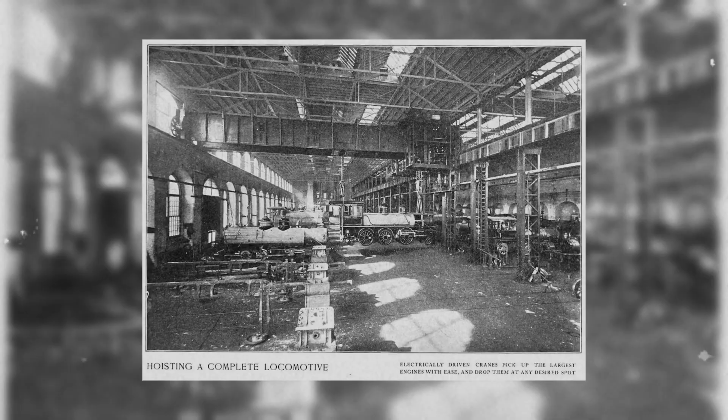Decades prior, this was no mere factory. It was a sprawling, self-sustaining kingdom. At its zenith, 20,000 workers labored in its fiery belly, forging over 70,000 locomotives that conquered untamed frontiers and stitched continents together. When two world wars plunged the globe into darkness, this very soil birthed thousands of Sherman and Patton tanks, acting as a relentless arsenal of democracy. Its foundries burned with a fierce ambition that seemed to challenge the sun itself.

Now that empire is ash. The deafening symphony of forging hammers and hissing steam has been swallowed by the hollow wind howling over rusted scrap. A city of livelihoods evaporated into nothingness.

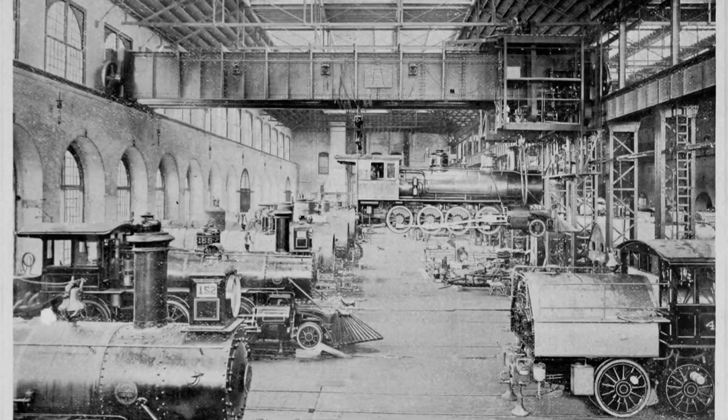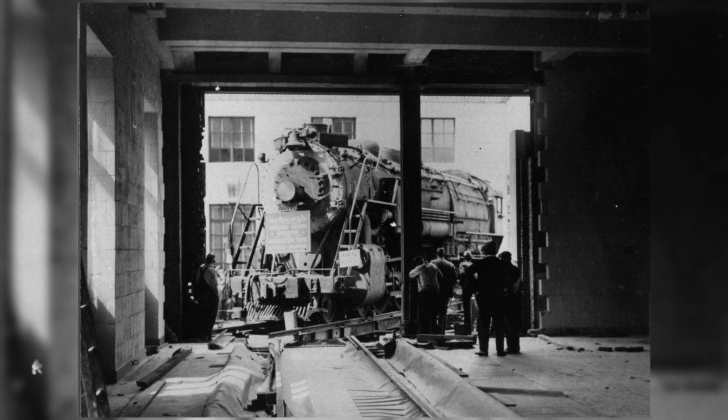How does an undisputed titan of such colossal power, the very engine of the modern world, simply vanish? It wasn't a sudden economic crash. It wasn't foreign sabotage. The beast was devoured from within by a singular, blinding hubris. This is the saga of Baldwin's Eddystone. Step into the ruins of an industrial titan to witness a profound tale of towering ambition, tragic pride, and the devastating cost of a king refusing to change his crown.

Long before the silence claimed the Delaware River, there was a deafening roar in the heart of Philadelphia. By the turn of the 20th century, the Baldwin Locomotive Works was not merely a company. It was a reigning monarch of the industrial age. Yet, this undisputed king of steam was slowly being suffocated by the very kingdom it helped build.

For decades, Baldwin's sprawling Broad Street complex had been a marvel of manufacturing, a dense, pulsating labyrinth of brick and iron right in the middle of a rapidly modernizing metropolis. But success has a peculiar way of becoming a cage. As the American frontier expanded and global trade exploded, the world did not just want more locomotives, it demanded larger, heavier, and infinitely more powerful machines. The era of quaint, wood-burning engines had passed, giving way to fire-breathing leviathans made of solid steel.

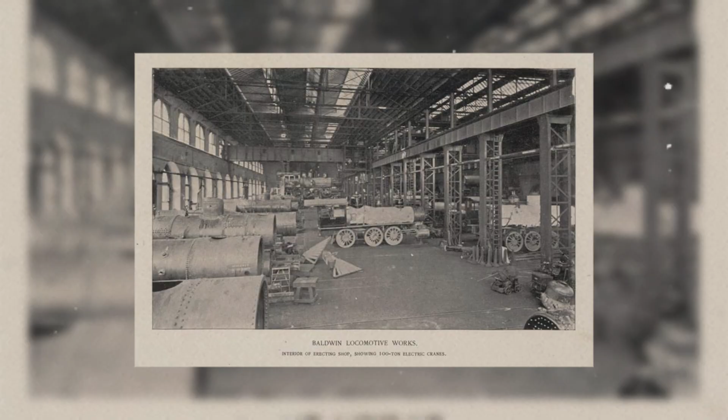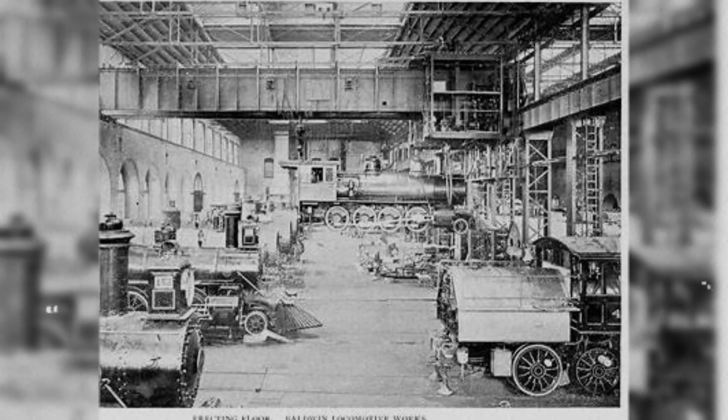The Broad Street facility, however, could not stretch. It was landlocked by the encroaching city, trapped in a grid of narrow streets, civic buildings, and residential neighborhoods. The situation bordered on the absurd. To move a completed locomotive out of the factory, workers often had to halt city traffic, navigating multi-ton behemoths through tightly packed intersections. The ground of Philadelphia trembled daily beneath the weight of progress, and the sky was perpetually choked with the thick, acrid smoke of the foundries. The citizens, though proud of their industrial titan, were growing tired of sweeping soot from their pristine porches. Baldwin had become a giant forced to live in a closet.

The leadership of Baldwin, driven by the relentless and visionary energy of men like Samuel Vauclain, recognized a terrifying truth: to stand still in the age of industry was to die. They could not continue to build the future's iron arteries in a facility that belonged to the past. The company needed space, not just to breathe, but to conquer. They required a blank canvas vast enough to hold ambitions that bordered on the mythical.

The search for a new home led them away from the claustrophobic avenues of Philadelphia and down the Delaware River. What they found, approximately 13 miles to the south, was not a glittering industrial park, but a desolate, marshy expanse known as Eddystone. It was 600 acres of damp, unpromising earth, heavily burdened by tidal mud and wild overgrowth. To the untrained eye, it was a wasteland. To the visionaries at Baldwin, it was paradise.

The proposal to purchase and develop Eddystone was a masterclass in industrial audacity. It was not simply a matter of erecting a few new warehouses. The plan called for the creation of an entirely new, self-sustaining world. It meant uprooting an established workforce, tearing up decades of operational history, and pouring an astronomical fortune into a swamp.

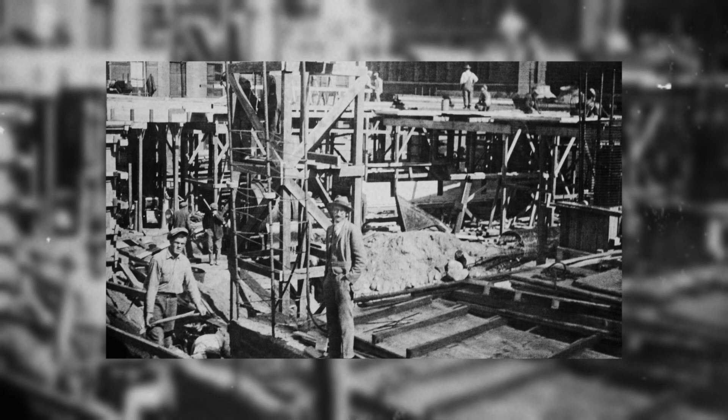There was also a profound emotional toll to the decision. Leaving Broad Street meant abandoning the sacred ground where Matthias Baldwin had built his very first locomotive, Old Ironsides, back in 1832. It was a severing of roots, a high-stakes gamble that traded a comfortable, proven history for a wild, muddy frontier. Yet the ambition of the era demanded sacrifice. The boardroom debates were fierce, but the writing on the wall was clear.

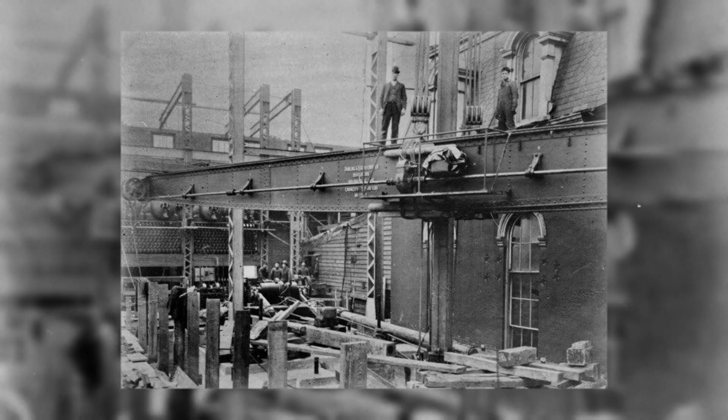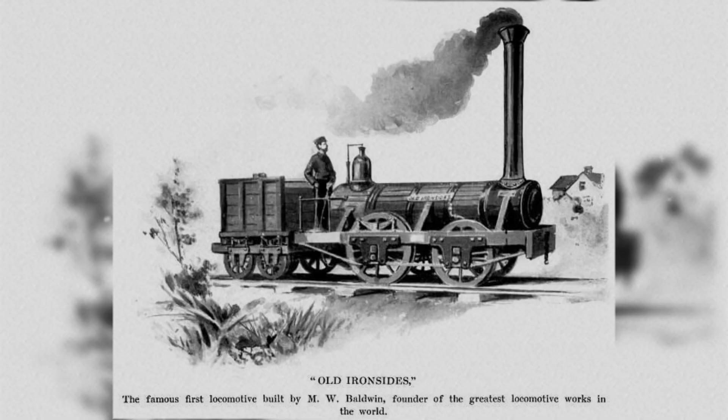The locomotives of tomorrow could not be born in the confines of yesterday. With a mixture of calculated brilliance and sheer, stubborn willpower, the decision was finalized. Baldwin would move. They would conquer the mud of Eddystone just as their engines had conquered the Rocky Mountains. They would not just build a factory, they would engineer a mechanized city-state, a monument to human labor and iron that would dwarf anything the world had ever seen.

As the first shovel struck the soft, marshy earth of the Delaware riverbank, the die was cast. The great migration from the cramped heart of Philadelphia to the sprawling shores of Eddystone began. It was the birth of an empire, a monumental undertaking driven by the belief that human hands, armed with enough capital and ambition, could bend geography itself to the will of industry. The ground was being laid for a golden age, setting the stage for a mechanical symphony that would echo across the globe.

The transformation of Eddystone from a silent, waterlogged marsh into the undisputed capital of global locomotive manufacturing did not happen overnight. It was a grueling, decades-long campaign against nature itself. Beginning in the early 1900s, the Baldwin Locomotive Works unleashed an army of engineers and laborers upon the shores of the Delaware River. Their mission was not merely to erect buildings, but to terraform the earth to bear the unimaginable weight of heavy industry. Thousands of wooden pilings were driven deep into the thick mud to reach bedrock, creating a subterranean foundation strong enough to support the massive drop forges and iron foundries that would soon follow.

As the skeletal steel frames of the new buildings pierced the skyline, the sheer, staggering scale of the Eddystone blueprint became visible. This was not a factory. It was a sovereign industrial city-state. Spanning over 600 acres, the complex was meticulously designed to be an entirely self-sustaining ecosystem. The sprawling site was eventually woven together by nearly 30 miles of internal railway tracks, a complex nervous system of standard and narrow-gauge lines that transported raw materials, giant boiler plates, and partially assembled engines between dozens of specialized shops.

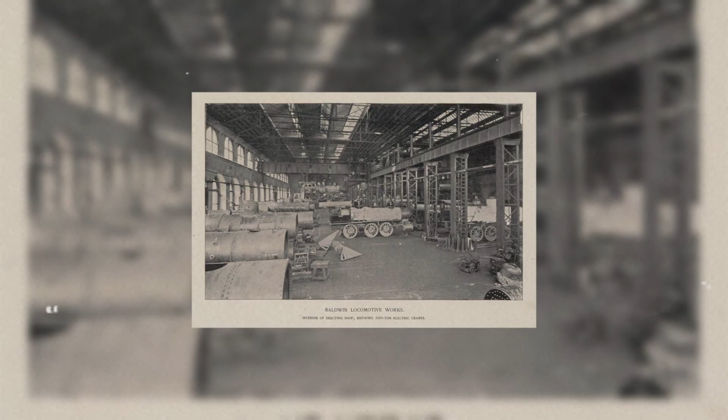Every geographical feature of the land was weaponized for maximum efficiency. The Delaware River was no longer just a scenic boundary, it was transformed into a global shipping artery. Baldwin constructed massive deep-water docks equipped with towering cranes, allowing ocean-going freighters to pull up directly to the factory's edge. This meant a locomotive could be tested on the Eddystone tracks in the morning and loaded directly into the hull of a ship bound for South America or Europe by nightfall.

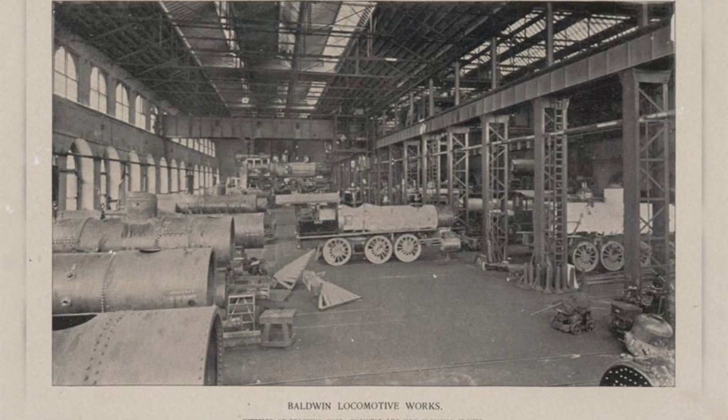Inside the walls, the architecture was cavernous. The erecting shops were so unimaginably vast, stretching for fractions of a mile, that foremen and supervisors famously relied on bicycles to navigate the factory floor. Overhead, colossal bridge cranes glided along steel tracks, effortlessly lifting 80-ton boilers as if they were hollow toys. The central power plant, a towering structure billowing thick black smoke, generated enough electricity and compressed air to power a small metropolis.

By the 1920s, the painful, agonizing transition from the claustrophobic Broad Street plant was complete. The gamble had paid off. Baldwin had successfully transplanted its beating heart into a body uniquely designed to dominate the 20th century. The infrastructure was in place. The Leviathan's lair was built. All it needed now was the relentless, driving force of human labor to awaken the beast.

When the great whistles of Eddystone shrieked at the break of dawn, they summoned an army. The workforce swelled into the tens of thousands, transforming the surrounding Delaware County into a bustling hive of working-class neighborhoods. Generations of families, immigrants seeking the American dream, seasoned machinists and raw laborers, poured through the iron gates day after day. They were the blood in the factory's veins, feeding an insatiable hunger for production.

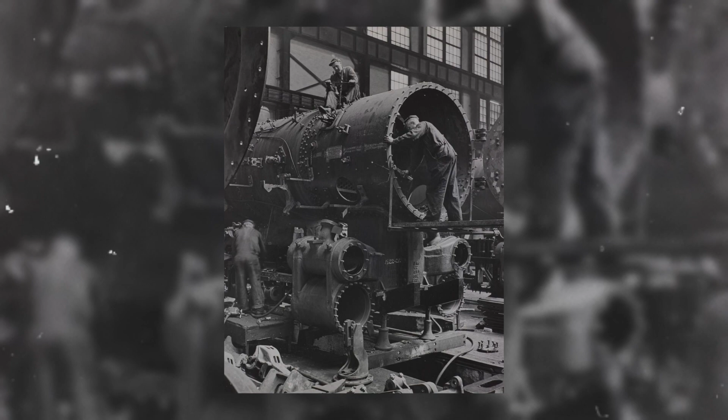The rhythm of Eddystone was a symphony of deafening violence. Inside the foundries, the temperature regularly soared past 120 degrees. Men wrapped in heavy protective leather danced around crucibles of molten iron, their faces illuminated by the demonic orange glow of liquid metal. Giant steam hammers, dropping with the force of small earthquakes, slammed into glowing ingots of steel, shaping the colossal driving rods that would propel the world's trains. The air was perpetually thick with the taste of sulfur, the sharp tang of ozone from early welding torches, and the ubiquitous, choking dust of coal and sand.

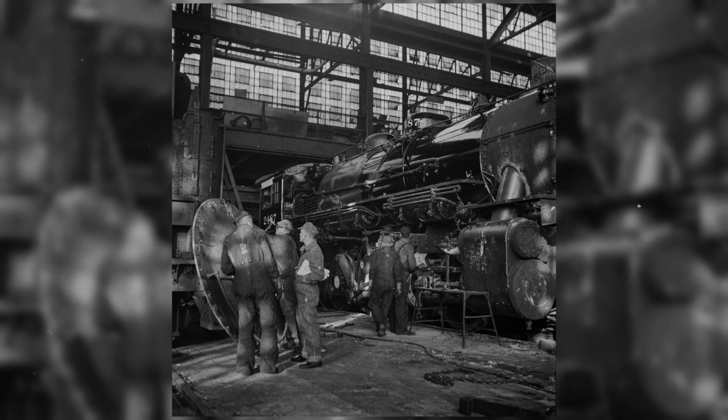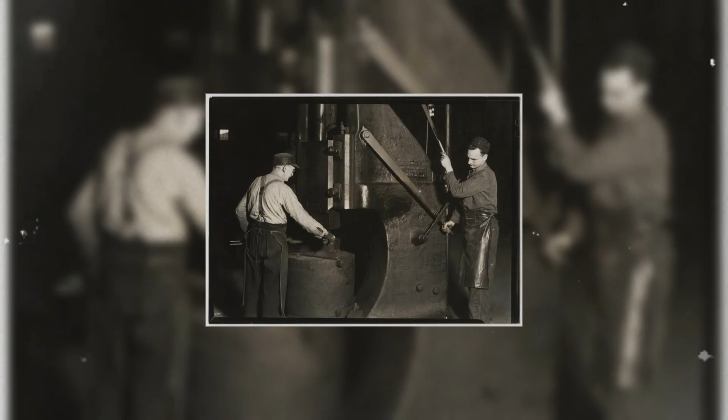Yet beneath this raw, violent display of brute force lay a demand for microscopic precision. A steam locomotive was a heavy-duty titan, but its internal valves, pistons, and cylinders required the delicate, exact tolerances of a Swiss watch. If a single boiler rivet was compromised, or a piston ring milled a fraction of an inch too wide, the resulting explosion could tear the machine, and the men around it, to pieces.

Managing this duality of colossal scale and millimeter precision was the true genius of the Eddystone workforce. During the golden age of steam, the output was staggering. Locomotives rolled out of the erecting shops in a seemingly endless procession. Baldwin was not just supplying the Pennsylvania Railroad or the Santa Fe.

They were equipping the world. Eddystone engines climbed the treacherous, thin-aired passes of the Andes in Chile, crossed the frozen steppes of Imperial Russia, and hauled freight across the deserts of Egypt. They were the undisputed mechanical marvels of their time, custom-built beasts tailored to the exact specifications of any gauge, climate, or terrain on Earth. However, this relentless pace harbored a hidden, grinding tension.

The logistics of feeding the Eddystone machine were a daily tightrope walk. Millions of pounds of raw iron ore, coal, and lumber had to arrive with perfect timing. If the brass foundry fell behind by a few hours, the massive erecting shops ground to a halt, costing the company fortunes in idle labor. The pressure on the floor supervisors to maintain the flow of production was absolute and unforgiving.

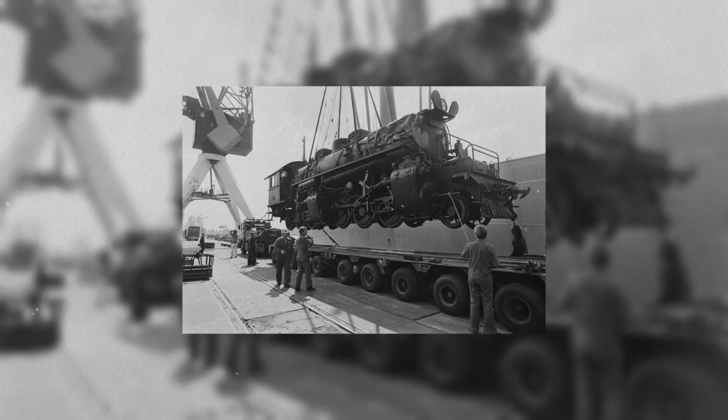For a time, the system held perfectly. Eddystone was a marvel of the modern world, a flawless engine of capitalism and engineering. As the 1930s approached, the men of Baldwin looked out over their 600-acre domain of fire and steam, confident that their reign would last forever. They were the kings of the rails, entirely unaware that the darkest, most demanding trials of human history were looming just over the horizon, ready to push the great factory to its absolute, breaking limit.

The sprawling complex of Eddystone had barely settled into its rhythm as the world's premier locomotive manufacturer when the geopolitical foundations of the globe fractured. In the summer of 1914, Europe descended into the unprecedented carnage of the First World War. The conflict quickly devolved into a grueling war of attrition, demanding logistical supply lines and munitions on a scale humanity had never witnessed. The combatant nations looked across the Atlantic for an industrial savior, and the colossal, fire-breathing foundries of Baldwin's Eddystone were uniquely positioned to answer the call.

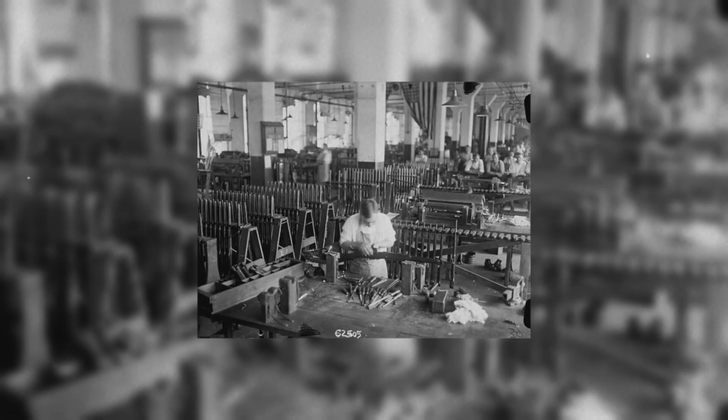Almost overnight, the mission of the great plant shifted from connecting cities to arming empires. The company did not merely increase its locomotive production, it radically diversified its manufacturing base to feed the insatiable hunger of the Western Front. Recognizing the desperate need for infantry weapons, Baldwin constructed a massive auxiliary facility on the Eddystone grounds, the Eddystone Rifle Plant. Operated in conjunction with Remington Arms, this colossal sub-factory became the largest rifle manufacturing plant in the world.

At its peak, the facility was churning out up to 6,000 M1917 Enfield rifles every single day. By the war's end, nearly 2 million rifles had been produced on Baldwin soil, arming the vast majority of the American Expeditionary Forces. But the transformation did not stop at small arms.

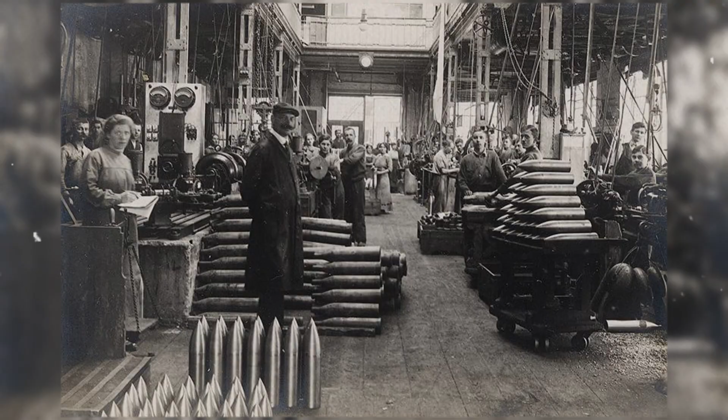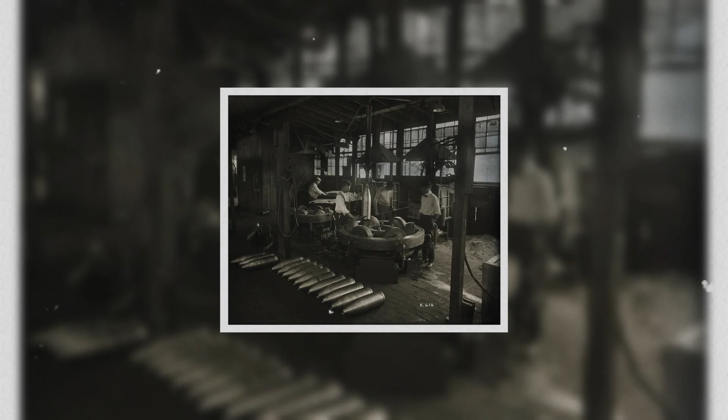The heavy hydraulic presses and giant drop forges that had previously shaped driving wheels and axles were recalibrated for a far more destructive purpose. Eddystone began producing millions of artillery shells, transforming raw steel into high-explosive ordnance, destined for the trenches of France and Belgium. The factory floor became a chaotic, deafening landscape where the sharp, metallic clatter of rifle assembly lines competed with the ground-shaking thunder of heavy munitions forging.

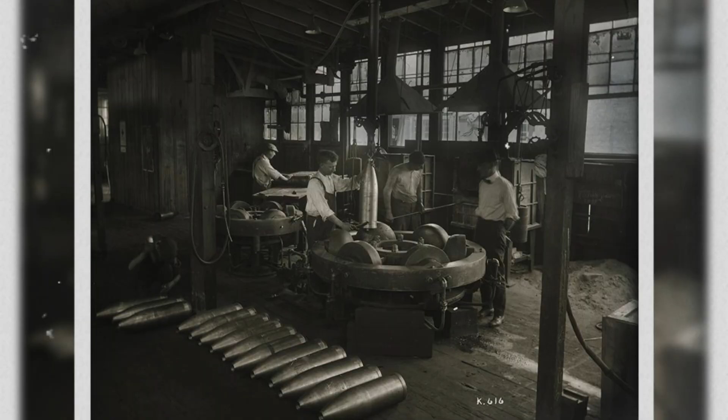Amidst the production of weapons, Baldwin's core competency remained critical to the war effort. The muddy, cratered battlefields of Europe required robust, reliable transportation to move troops and supplies to the front lines. To meet this demand, Eddystone engineers designed and mass-produced the Pershing locomotives, rugged, specialized steam engines built specifically for the grueling conditions of military railways in France. These iron beasts were rapidly assembled, loaded onto transport ships at the Eddystone docks, and sent directly into the theater of war.

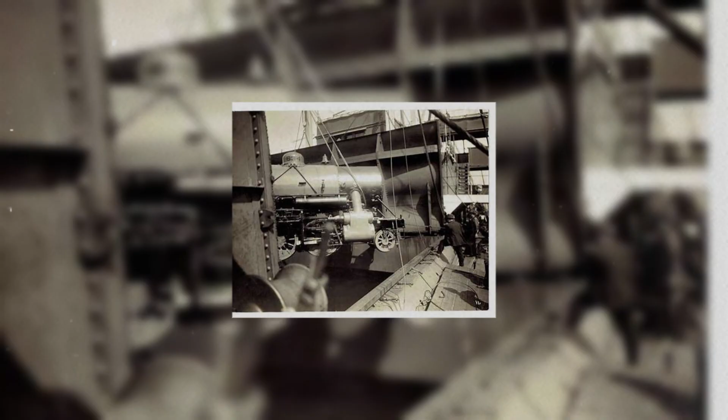This period of explosive wartime expansion injected an unprecedented surge of capital into the Baldwin locomotive works. The government contracts were massive, guaranteed, and seemingly endless. The workforce swelled dramatically, operating in frantic, around-the-clock shifts.

However, this staggering success carried a hidden psychological poison. The sheer volume of output and the immense profits generated during the Great War created a dangerous illusion of invincibility within the Baldwin boardroom. The executives looked at their roaring furnaces and their sprawling 600-acre empire and began to equate sheer industrial mass with permanent supremacy. The sudden flood of wartime money insulated the company from the normal, brutal forces of market competition, planting the early, invisible seeds of complacency that would eventually prove fatal.

The illusion of eternal dominance was severely tested during the Great Depression, which brought railway orders to a devastating halt, yet the sheer size of Baldwin allowed it to weather the storm. But just as the company was stabilizing, the world was plunged into darkness once again.

The outbreak of the Second World War demanded an industrial mobilization that dwarfed even the staggering efforts of the previous conflict. Once more, the United States government turned to the proven titan of Eddystone. This time, the nature of mechanized warfare had evolved, and Baldwin adapted with breathtaking speed.

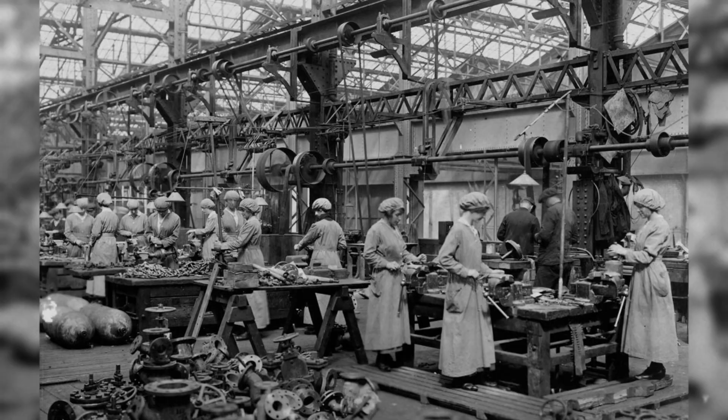Beyond tanks, the facility manufactured massive ship propellers for the U.S. Navy, heavy naval gun mounts, and specialized railway artillery. The workforce transformed again, this time integrating thousands of women who stepped onto the heavy factory floors to operate cranes, weld tank treads, and inspect munitions, keeping the Leviathan running while the men fought overseas.

The patriotic fervor within Eddystone was absolute. Every worker knew that the steel they poured directly contributed to the survival of the free world. Yet beneath the roaring success of this wartime production lay a catastrophic, strategic trap.

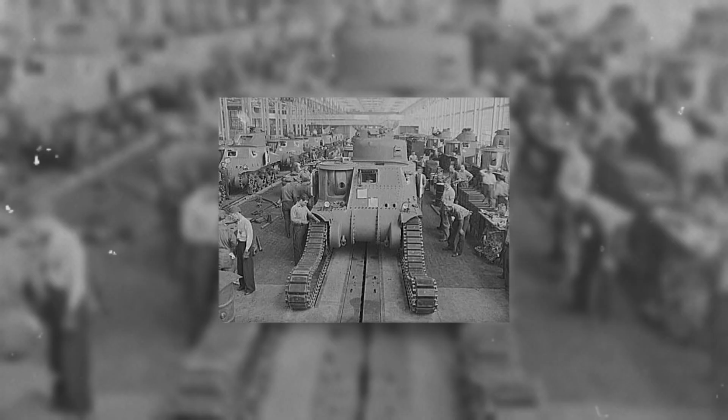The U.S. military logistics network relied heavily on established, reliable technology to move millions of tons of domestic freight to the coasts. Consequently, the War Production Board ordered Baldwin to do what it did best: mass-produce standard steam locomotives. While this mandate was critical for the immediate war effort, it effectively forced Baldwin to double down on an aging technology. All civilian research and development was frozen.

The brilliant engineering minds at Eddystone were entirely consumed by the demands of producing tanks, shells, and wartime steam engines. They had no time, no resources, and no government permission to experiment with alternative forms of propulsion.

Meanwhile, away from the heavy demands of military steam production, a rival was quietly altering the future. General Motors, through its Electro-Motive Division, had already begun perfecting diesel-electric technology before the war. While Baldwin was locked into producing the heavy, maintenance-intensive steam engines required by the military, the diesel engine was being refined into a highly efficient, labor-saving machine.

When the Axis powers finally surrendered and the massive government contracts evaporated overnight, Baldwin awoke to a terrifying new reality. Their triumphant performance in the Second World War had been a brilliant, blinding flash of light that perfectly masked their technological stagnation. They emerged from the conflict as the absolute masters of a dying art, completely unprepared for the silent, efficient revolution that was about to render their fiery empire obsolete.

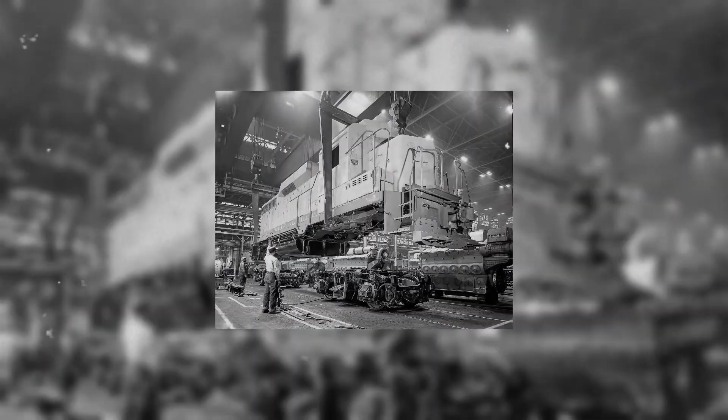When the smoke of the Second World War finally cleared, the Baldwin Locomotive Works stood atop an industrial mountain of its own making. The Eddystone facility was operating at a staggering capacity, its massive foundries still glowing with the heat of wartime production and a massive backlog of domestic orders.

The world was rebuilding, and the executives in Philadelphia believed that the rebuilding would be powered, as it always had been, by the violent, magnificent force of steam. They were the undisputed masters of the firebox, the boiler, and the driving rod. In their eyes, the steam locomotive was not merely a product, it was the ultimate, perfected expression of human engineering.

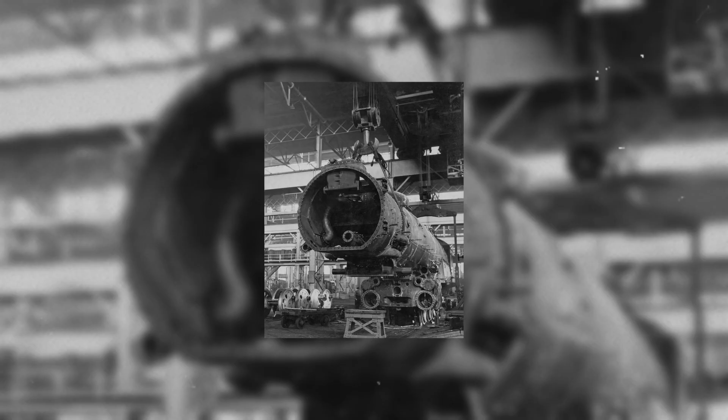Yet, while Baldwin was deafened by the roar of their own success, a quieter, far more insidious revolution was taking place in the American Midwest. General Motors, through its Electro-Motive Division, EMD, had spent the war years perfecting a radically different kind of motive power: the diesel-electric locomotive. To the seasoned veterans of Eddystone, the diesel engine was an object of derision.

It lacked the visceral, breathing soul of a steam engine. A steam locomotive was a custom-tailored behemoth. Railroads would send their chief engineers to Eddystone to dictate every minute specification, from the diameter of the driving wheels to the exact placement of the brass trim. Every steam engine was a unique work of art, a massive, labor-intensive beast that required a dedicated crew to feed it coal, monitor its water levels, and constantly maintain its intricate external moving parts.

The diesel, by contrast, was a sterile, standardized box. It was essentially a power plant on wheels, a diesel engine turning a generator, which in turn powered electric traction motors on the axles. It didn't roar, it hummed. It didn't require a fireman to shovel coal or an ash pit to clean its underbelly. Most offensively to the traditionalists at Baldwin, General Motors did not custom build them. They treated locomotives like automobiles, offering a catalog of standardized models, mass-produced on an assembly line with interchangeable parts.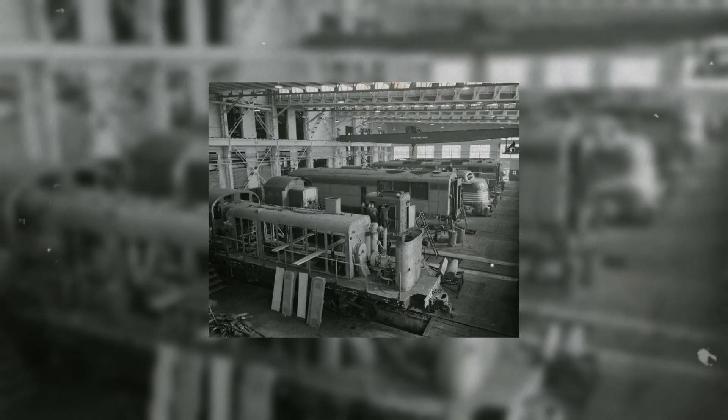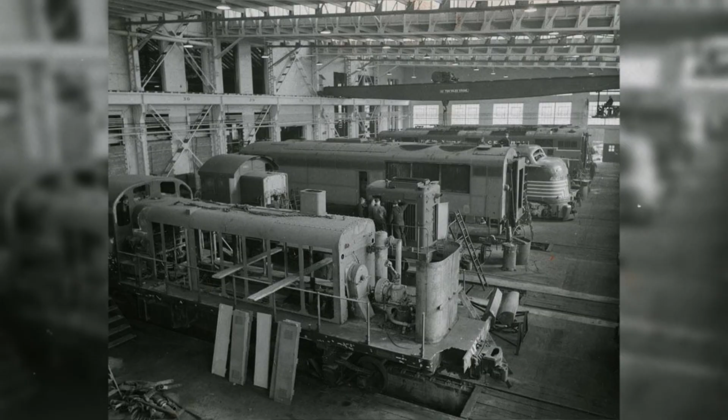This conceptual clash created a fatal, blinding hubris within the Baldwin boardroom. The leadership, men who had spent their entire lives mastering the metallurgy of high-pressure steam, simply could not and would not fathom that a glorified generator could ever replace the raw, tractive effort of a heavy steam engine.

They publicly dismissed diesels as a passing fad, suitable perhaps for lightweight passenger trains or small switching yards, but entirely incapable of hauling heavy freight over steep mountain grades. "They will never replace steam" became the unspoken, rigid dogma of the company. It was a failure of imagination rooted in immense pride.

Baldwin's leadership fell into the classic trap of the incumbent giant. They defined their business by the specific product they made rather than the problem they solved. They believed they were in the business of building steam locomotives, failing to realize that their customers were simply in the business of moving freight as cheaply and efficiently as possible. This arrogant devotion to their legacy blinded them to the reality that the very definition of power was changing.

The stubborn refusal to accept the changing tide might have been sustainable in a vacuum, but the post-war American economy was unforgiving. The railroads, facing increasing competition from the rapidly expanding highway system and the commercial airline industry, were under massive pressure to cut operational costs. And when the railroad accountants began to run the numbers, the romance of steam evaporated in the face of brutal, undeniable mathematics.

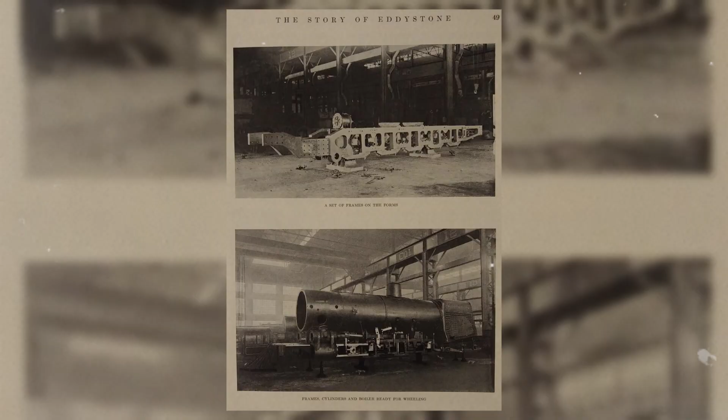The economic advantage of the diesel-electric locomotive was absolute. A steam engine, for all its majesty, was horrifyingly inefficient. It spent hours every day out of service, taking on water, loading coal, dumping ash, and undergoing constant preventative maintenance. It required a vast, expensive infrastructure of water towers, coaling stations, and specialized roundhouses spaced every 100 miles along a route. A diesel, on the other hand, could run from Chicago to Los Angeles with only brief stops to refuel. It was ready to pull a train at the push of a button, required only a single engineer to operate, and eliminated the need for the massive support infrastructure that steam demanded.

General Motors capitalized on this by offering railroads a revolutionary proposition: standardized parts that could be easily swapped out, drastically reducing repair times and keeping the engines on the tracks generating revenue.

The tipping point arrived when even Baldwin's most loyal and steadfast customers began to defect. The Pennsylvania Railroad, whose headquarters were just miles away from Eddystone and who had purchased thousands of Baldwin steam engines over a century, began placing massive, multi-million-dollar orders for GM diesels. It was a crushing, unmistakable signal. The market had spoken, and it had chosen efficiency over tradition.

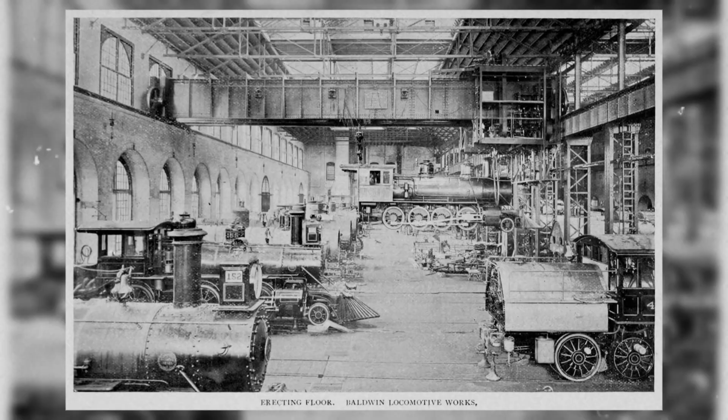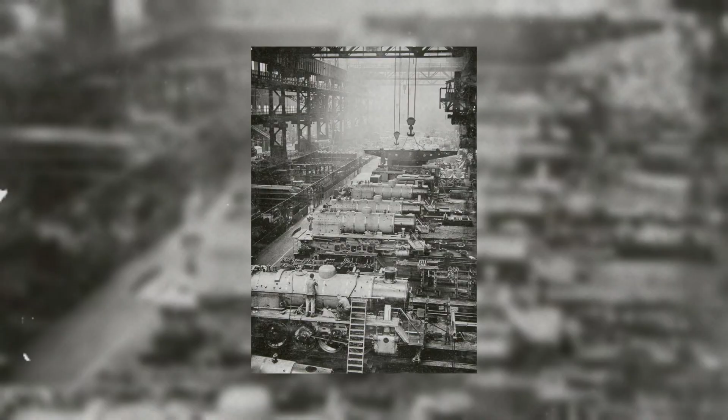The panic that finally gripped the Eddystone boardroom was absolute. The realization that they had squandered critical years of research and development crashed down upon the executives. They were the masters of mechanical engineering, but diesel-electric technology required deep expertise in internal combustion and complex electrical systems, areas where Baldwin's institutional knowledge was dangerously thin. They had essentially brought a hammer to a surgical operation.

In a desperate, frantic scramble to pivot, Baldwin ordered its engineers to design and build road diesels to compete with GM. But the damage of their delay was already profound. They were years behind in testing, entirely lacking the standardized manufacturing processes that made EMD so profitable.

Worse still, the stubborn culture of Eddystone bled into their new designs. Instead of adopting the assembly line standardization of General Motors, Baldwin treated their early diesels like steam engines, customizing them for different buyers, using a dizzying array of non-standard electrical components and creating a logistical nightmare for the railroads trying to maintain them. The transition was clumsy, reactive, and agonizing.

The undisputed kings of the rails had suddenly become desperate followers, scrambling in the dark to catch a train that had already left the station. The fortress of Eddystone was intact, but its soul was critically wounded.

The immense foundries of Eddystone, once the undisputed anvil of the gods where modern civilization was forged, now felt like a sprawling industrial mausoleum. By the dawn of the 1950s, the deafening roar of production that had defined Baldwin for over a century began to ring hollow.

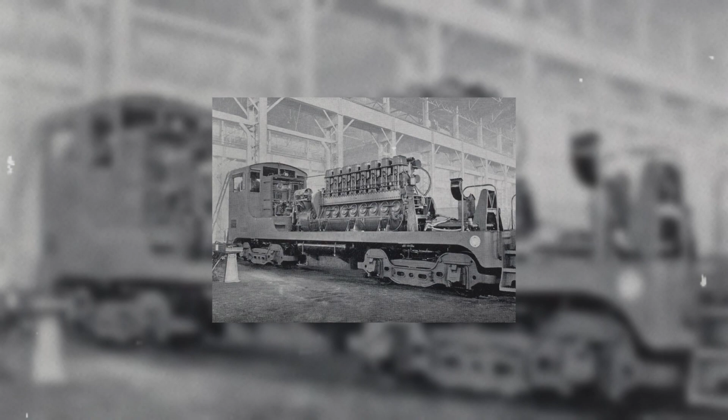In 1950, Baldwin brokered a monumental alliance intended to terrify the market into submission. They merged with the Lima-Hamilton Corporation, another legendary builder of steam locomotives facing the exact same existential dread. The resulting conglomerate, Baldwin-Lima-Hamilton, BLH, was heralded in the press as a colossal industrial counteroffensive.

On paper, it was a behemoth. It combined massive manufacturing footprints, historic pedigrees, and a theoretical pooling of the greatest heavy engineering talent in the United States. Yet to cynical observers on the factory floor and sharp-eyed accountants of the major railroads, the BLH merger was a tragedy masquerading as a triumph. It was less a strategic partnership and more a desperate, suffocating embrace between two drowning empires.

Tying two sinking ships together did not make them float. It simply ensured they would drag each other into the abyss much faster.

The immediate consequence of the merger was absolute administrative and cultural chaos. The sprawling acreage of Eddystone was suddenly burdened with the bureaucratic bloat of integrating a distant workforce and incompatible corporate philosophies. Lima-Hamilton engineers, fiercely proud of their own heritage, clashed with the entrenched aristocratic mindset of the Baldwin veterans. Instead of a unified, streamlined offensive against General Motors, the newly formed BLH became a tangled knot of competing interests, redundant departments, and paralyzing internal politics.

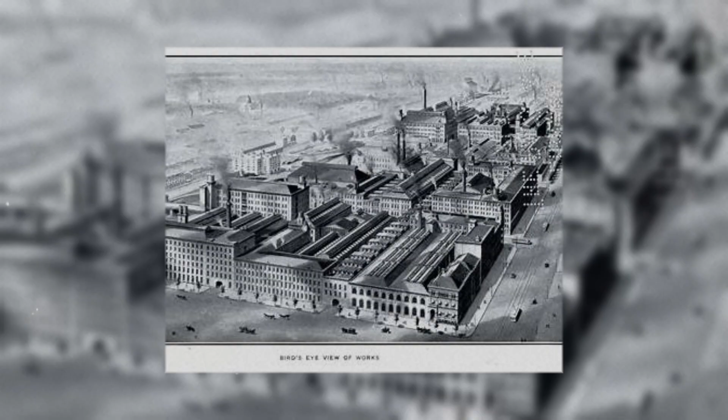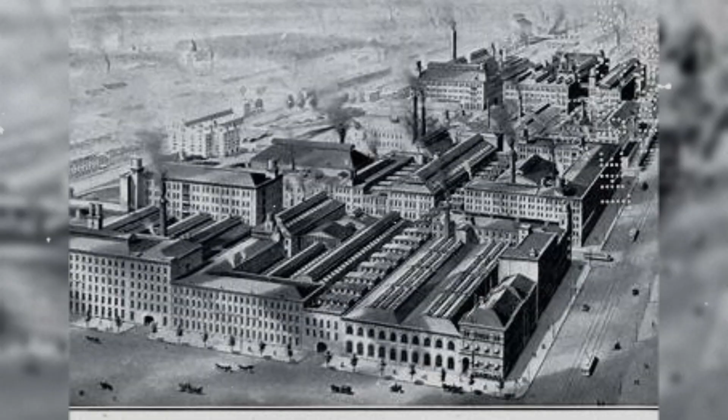The vast erecting shops of Eddystone had always been a cathedral of noise, a place where the deafening roar of industry was a testament to American might. But by the early 1950s, a haunting acoustic shift had occurred. The thunderous cadence of the steam hammers was slowing down, replaced by long, echoing intervals of silence. The age of steam was in its death throes, and the floor of the Baldwin plant had unwittingly become the stage for a grand industrial funeral.

For decades, the creation of a steam locomotive had been an act of brutal artistry. The men who populated the heavy foundries and boiler shops were not merely factory workers, they were master artisans of heavy metallurgy. To watch a Baldwin boilermaker at work was to witness a lifetime of specialized, localized knowledge in action. These were men who could judge the exact temperature of a glowing steel rivet simply by its color, who understood the intricate physics of high-pressure steam through intuition and muscle memory.

It was a trade passed down through generations, from fathers to sons, creating a localized aristocracy of labor within Delaware County. Now, those exact skills, honed over decades of sweat, burns, and relentless dedication, were being rendered instantly and completely worthless by the march of progress.

The profound tragedy of Eddystone's decline was most visible in the eyes of these veteran mechanics. As the final orders for steam locomotives trickled in, mostly desperate, belated purchases from foreign markets such as India or smaller, stubbornly traditional domestic lines, the workers approached their tasks with a heavy, unspoken grief. They knew they were forging the ghosts of a dying world. When the massive overhead cranes lowered the final towering boilers onto their steel frames, there was no longer a sense of triumphant completion. Instead, there was the hollow dread of an impending end.

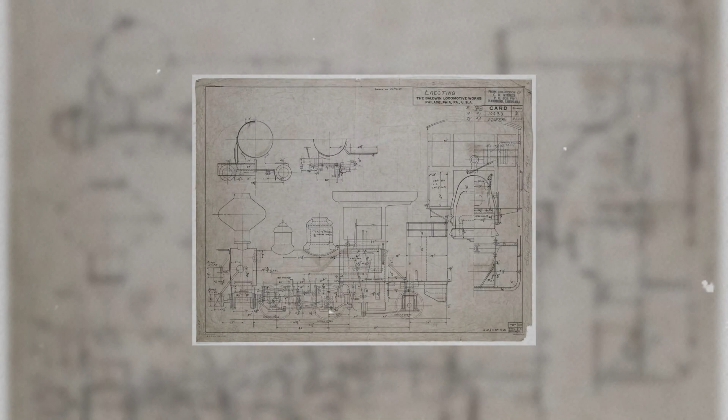In stark contrast to the majestic, breathing beasts they had spent their lives building, the new diesel-electric units being haphazardly assembled in the adjacent bays felt cold and alien. To the veteran steam mechanic, a diesel was a soulless appliance. It required electricians and parts swappers, not blacksmiths and boilermakers. The transition was not just a shift in manufacturing technique, it was a profound devaluation of human capital. A master riveter whose precise hammer strikes had once held together the very fabric of American commerce was suddenly an unskilled laborer in a world that demanded complex wiring schematics and high-tolerance generator maintenance.

The tension between the factory floor and the executive offices grew venomous. Upstairs, in the quiet, mahogany-paneled boardrooms, the reality of the situation was stripped of all romance and reduced to cold, unforgiving mathematics. The charts detailing steam revenue were trapped in a terminal dive. The executives, desperate to stem the bleeding from their disastrous merger with Lima Hamilton, looked at the sprawling steam facilities not as hallowed ground, but as massive taxable liabilities. They could not afford sentimentality. The very physical scale of the steam operations, the massive casting pits, the colossal drop forges, the miles of specialized internal track, had become an economic anchor dragging the entire company down.

The decision was made to ruthlessly amputate the dying limbs of the empire. The layoffs were merciless and sweeping. Foremen, fighting back tears and anger, were forced to hand pink slips to men they had worked beside for 30 years. The local taverns and diners around Eddystone, once vibrating with the boisterous energy of thousands of exhausted, well-paid workers at shift change, grew quiet and tense. Families that had relied on Baldwin paychecks for three generations suddenly found themselves staring into a terrifying abyss of unemployment. The company was shedding its most experienced, loyal personnel simply because the free market had stopped asking for the miracles they knew how to perform.

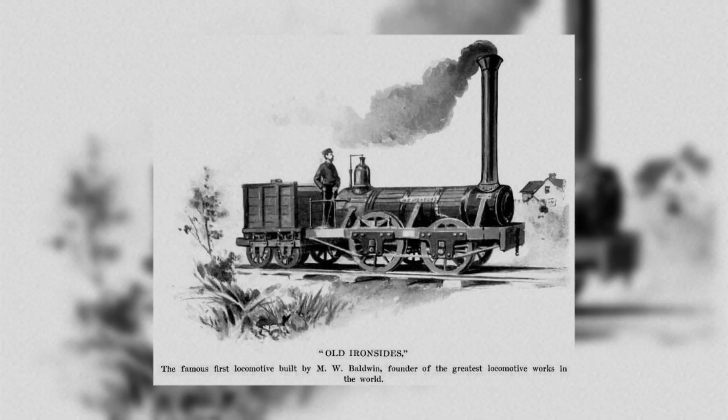When the final steam locomotive eventually rolled out of the Eddystone erecting shop, a magnificent, gleaming anachronism destined for a world that had already moved on, the event was profoundly muted. The great whistles of the factory, which had once shrieked in celebration of every major production milestone, remained stubbornly silent. The workers lined the tracks, soot-stained and quiet, wiping grease from their calloused hands as they watched the heavy driving wheels turn for the very last time. As the engine disappeared down the line, a chilling realization settled over the vast, cavernous buildings left in its wake. The fires in the heavy drop forges were allowed to burn out, and the ash was swept away.

The heart of Baldwin, the primal, fiery furnace that had sustained a community and powered a nation, had stopped beating. The men walked back to their lockers, acutely aware that while the factory doors were technically still open, the true soul of Eddystone had just departed on those tracks, never to return.

By the mid-1950s, the financial hemorrhage at Baldwin Lima Hamilton had escalated into a spectacular corporate crisis that was impossible to conceal. The sprawling Eddystone complex, once an untouchable fortress of American industry and a proud symbol of the nation's mechanical supremacy, was now widely viewed on Wall Street as a distressed, lumbering asset.

It was a wounded, bleeding titan, thrashing helplessly in the shallow waters of a changing economy. The blood in the water naturally attracted predators, marking the beginning of a grim, humiliating new chapter. The fate of the historic factory was no longer guided by visionary engineers or master machinists, but by distant financiers wielding ledger books like butcher knives.

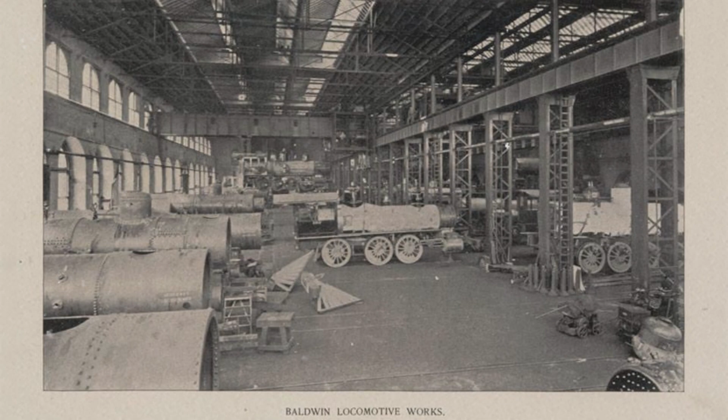To the seasoned machinists and proud boilermakers of Delaware County, the news was received with a mixture of stunned disbelief and bitter gallows humor. The hallowed foundries that had birthed the mighty engines that conquered the West and won the Second World War were now, for all practical purposes, being overseen by corporate butchers. The profound, almost mythical reverence for metallurgy, high-pressure steam, and heavy steel that had defined the Baldwin ethos for over a century meant absolutely nothing to the new regime.

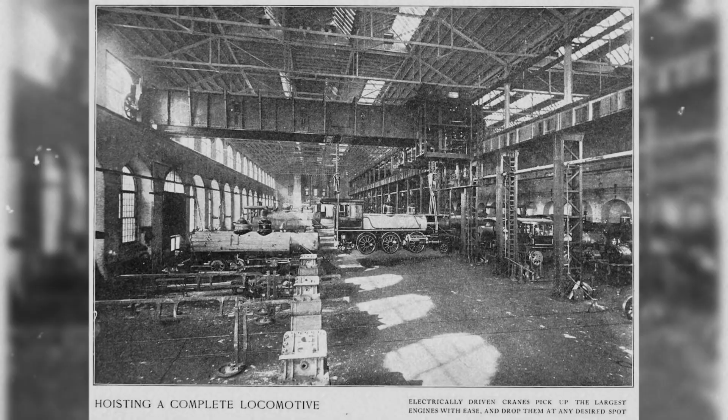Armour's executives did not look at Eddystone and see a cathedral of engineering. They looked at the sprawling 600 acres, the massive stockpiles of raw steel, and the extensive rail networks, and saw only dormant capital waiting to be violently extracted. The corporate philosophy shifted overnight from creation to aggressive liquidation. The meatpackers approached the locomotive business with the exact same ruthless, dispassionate efficiency they applied to a slaughterhouse: trim the fat, isolate the immediately profitable cuts, and discard the rest.

Research and development budgets for the struggling diesel line, the only potential path to the future, were slashed to the bone. Essential, routine maintenance on the colossal factory roofs and heavy bridge cranes was indefinitely deferred to make the quarterly balance sheets look artificially healthier. The overarching strategy was no longer to conquer the General Motors monopoly, but to aggressively harvest whatever residual value remained in the Baldwin name before the entire enterprise inevitably collapsed.

The consequences of this financial cannibalism quickly manifested physically across the Eddystone landscape, transforming a monument of progress into a sprawling architecture of decay. The factory, which had once felt like a living, breathing organism, a vibrant city-state humming with the violent, beautiful purpose of creation, began to visibly rot. Broken windows in the cavernous erecting shops were left unpatched, allowing the cold, biting winds off the Delaware River to sweep through cavernous workspaces where 1,000-degree crucibles had once glowed like captured suns.

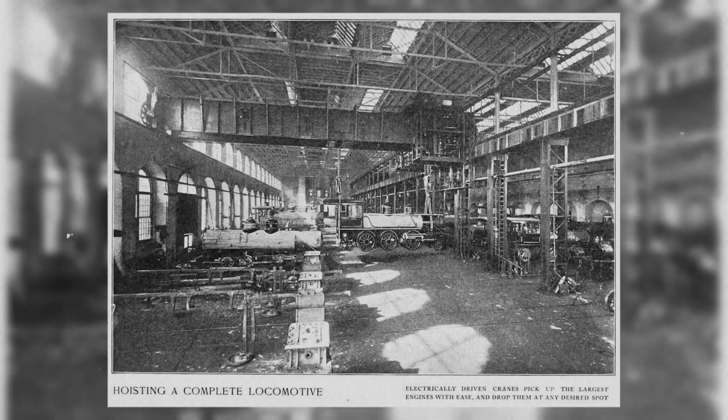A profound, melancholic lethargy infected the remaining workers, moving through the cavernous shops like phantoms of a forgotten age. The poetic, thunderous rhythm of the hammers, the heartbeat of their industrial lives and the pride of their community, had been replaced by the quiet, terrifying scratching of administrative pens and the cold click of typewriters. There was a grim, shared understanding among the men on the floor that they were no longer building the future. They were simply hired mourners presiding over a prolonged corporate funeral.

They watched in silent, impotent fury as entire manufacturing divisions were shut down, the heavy, bespoke machinery unceremoniously ripped from its concrete moorings and auctioned off to scrap dealers or shipped to foreign competitors for pennies on the dollar. In a desperate bid to satisfy shareholders and stave off the inevitable, executives began to literally sell the ground out from under the factory. Parcels of the historic 600-acre site were partitioned off and leased to random, unrelated businesses. The unified sovereign empire of Eddystone was being slowly carved into pieces, a titan being fed to the wolves of Wall Street, one acre at a time.

The tragic, inescapable irony was absolute. The visionary leadership of Baldwin had originally fled the crowded confines of Broad Street precisely to secure the vast, unlimited space needed to build an empire without boundaries. Now trapped by their own historic hubris, paralyzed by a changing world, and bleeding capital from a thousand self-inflicted wounds, they were selling off their promised land just to keep the lights on for another quarter. The great mechanical behemoth was not merely dying. It was actively consuming its own flesh to survive a little longer in a world that had thoroughly and permanently abandoned it.